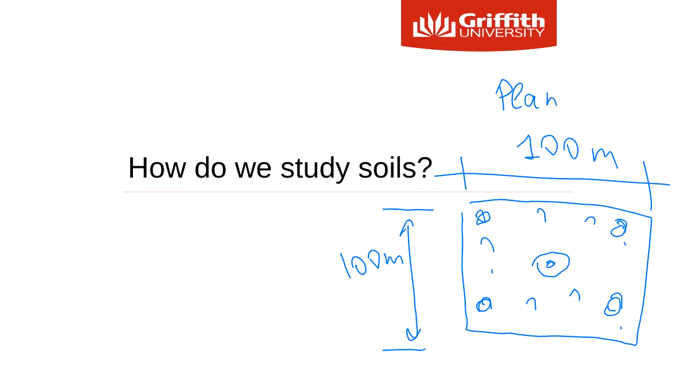And we can just interpolate the results from the middle, and assume maybe something is going to be very similar. So this is how we're going to cover this area.

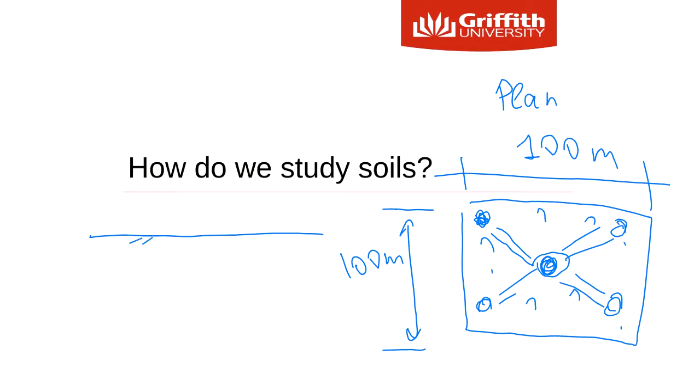So the first thing we would like to do is take samples. So we drill a borehole. If this is the ground, we're going to drill a borehole and collect samples from different depths.

And then we're going to look at the samples and see what kind of soil it is. So if we have more money, we can drill another borehole and also see what is here.

So this is borehole 2, this is borehole 1. Again, we know what is in this area and here, but imagine if this is about 100 meters distance - we still don't know what's in between.

Do you know any other methods, other than boreholes, that we can try to get a little idea what is in between? Because maybe there is the same material in boreholes 1 and 2, but maybe there's something different - what if there's some kind of soft layer of clay? And if we miss this layer of clay, there may be issues when we build a high-rise building.

So any ideas? What else can we do other than boreholes? Boreholes are good, but remember boreholes are probably the most costly type of investigation. So for small houses, you're probably going to have maybe 1 or 2 boreholes drilled for site investigation. But for something bigger, larger, you probably need more boreholes. But there are other methods.

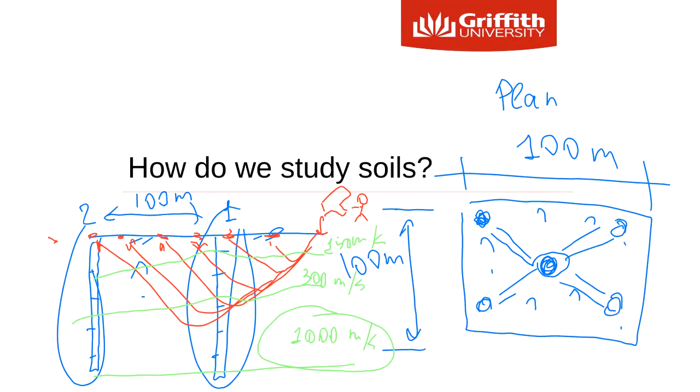So there are a few more methods that we'll talk about today, and I think the best one is for you to know the standard. We just follow the standard when we do site or field site or laboratory investigation, geotechnical investigation. Well, it's mostly site investigation. So it will teach you how many boreholes to drill.

It will teach you how deep the borehole should be, depending on the type of structure you design, what kind of and how many samples you need to take, how to describe the samples based on their properties. So everything is in this standard. This standard is available at any geotechnical company, and they follow this standard. So even if you don't know how to do that, just read the standard. It gives you a good explanation of the work.

Another thing which is important for site investigation, this is actually something that we need to do before any site investigation. We need to find geological maps. In Australia, we can find a geological map for any area, for any territory. They're all covered with a geological map.

So we just need to find what area in particular we're interested in, and I think we can buy a map from, I believe it's called Geoscience Australia or Geological Society of Australia. They sell maps, usually like $25–50 for each area.

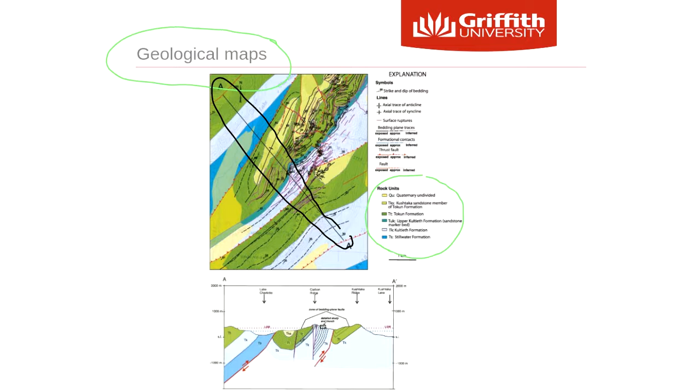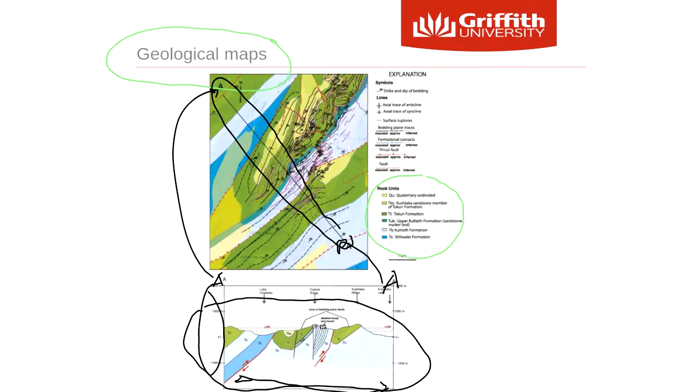And this is something that you will be required to do for your project number 1. So here you have depth, and this is distance. It starts from point A to A dash. Point A is here, A dash is here, and then it shows you what is underneath the surface. This one goes for 1,000 meters, which is very good.

So it gives you some idea about how these rock formations are placed against each other. If you see, this one actually dips at some angles. We wouldn't know that if we just look at the surface, like at the map—we don't know that they dip at different angles. When we see things like that, it's actually not very good, because all these folds and dipping of rock strata or soil formations make the soil or rock weathered and loose. So that's how we know that this area may be a little bit dangerous, and we need to do something about it.

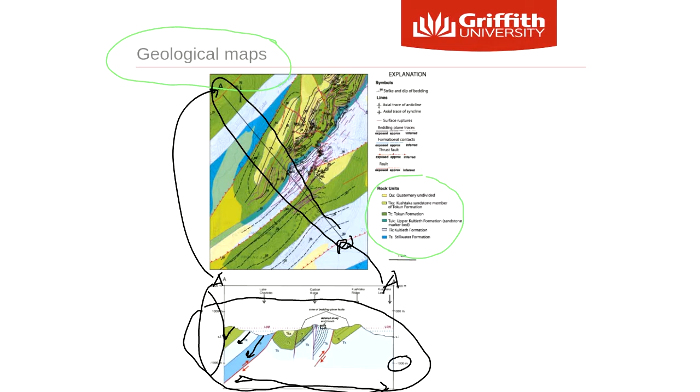Okay, so this is the geological map, and this is boreholes.

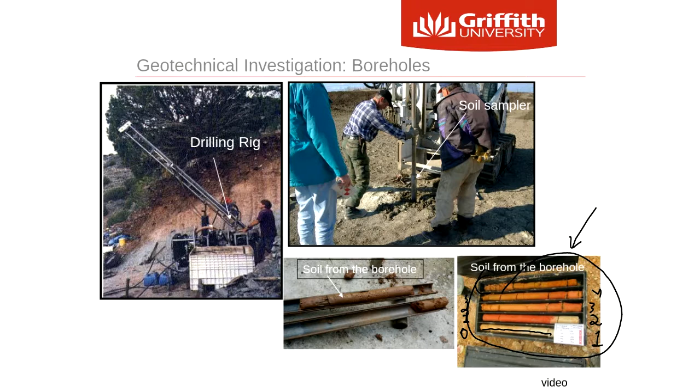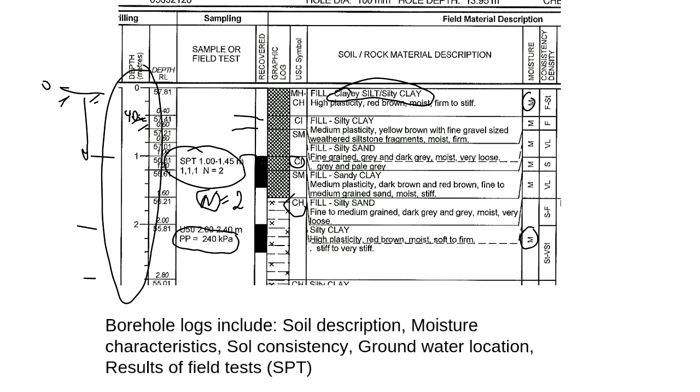Okay, another thing—groundwater. Where is groundwater here? There is no groundwater level here. I will show you in other borehole logs, and in the borehole log you'll be given for project one, there will be another column somewhere that will show you the groundwater level.

It shows where the water is in soil. So you may be aware that there is always water in the soil, and it creates a groundwater level, which means that soil below this groundwater level is saturated. So this is also important information. This is something that we need to know when we calculate stresses in soil, and I will teach you how

to do that later. Okay, so I'm going to my slides for today's... The recovered column represents the sample that was collected. So they collected a sample at this level and collected a sample at this level. So it's a U50. So maybe the way they drill it, they just drill until 1 meter. That's auger drilling, and they didn't collect good quality samples.

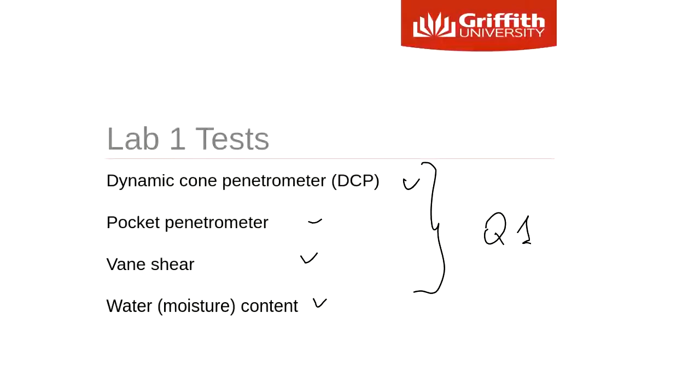Okay, so dynamic cone penetrometer tests. The first one we'll do, and there's a video of the test procedure, then pocket penetrometer, vane shear, and water moisture content. So all this will be in your quiz. Either it's a multiple choice question about test procedure, or for the water content test, I'm going to give you some data and you'll be asked to give me the water content. I will show you how to do it today.

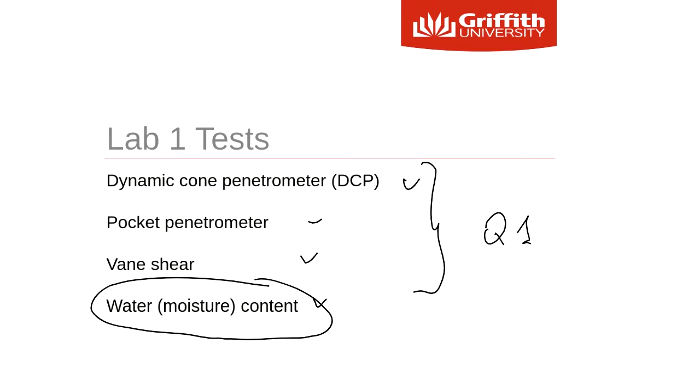Okay, so we'll start with the dynamic cone penetrometer. So this is the device. It has this rod and it's attached to the knocking head. And on top of the knocking head, there is a hammer. We lift the hammer manually and then release it. It falls down, it hits the head, and it will generate some energy force that will drive

the cone down. So in the video, you will see there are marks here, and each mark is 10 centimeters. So 10 centimeters, 20, 30, 40. So what we do, we just count the number of blows of the hammer to drive the cone in the ground by 10 centimeters. So when it goes all the way down until this level, we just need to know the number, let's say 2. So it means that we just need 2 blows of the hammer to drive it in the ground by 10 centimeters.

Then we just start counting again. So we'll see how many blows we need to drive the cone down by another 10 centimeters. And we just continue this test. For soft material, you will see that the test will go very quickly. It will be maybe 1, 2, 3 blows, and it will just go down because it's soft. For denser material, we will need a higher number of blows. And at some point, we're going to hit very hard material or even rock, at which point we cannot really go down anymore.

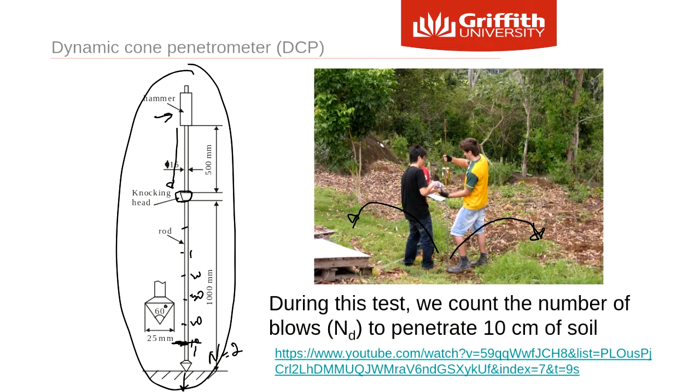So this is the kind of results that we can get from that very expensive test that we conducted. That was almost $1,000 worth. This is the data. So for each 10 centimeters that we penetrate the ground, we count the number of blows, and we plot it against the depth. So actually in that test, we went almost till 5 meters. That was really crazy. So don't do it. Don't make the same mistake as I did.

So the good thing about this test is it can give us some estimates of the soil strength. So if we know that the number of blows is maybe 2 or 3, we already have some correlations, some empirical relationship. If we know the type of soil, for example, clay, we can have some idea about its strength just looking at the number of blows.

Another good thing about this test is that you see how this one goes almost to 3 meters. There is some variation in the number of blows, but it only goes from maybe 2 to 4, right? So it looks like the same material or something very similar. And then at some level from 3 to 4, you will see some changes here. So in this case, you have a different number of blows. I think it's about 10 at this point, right?

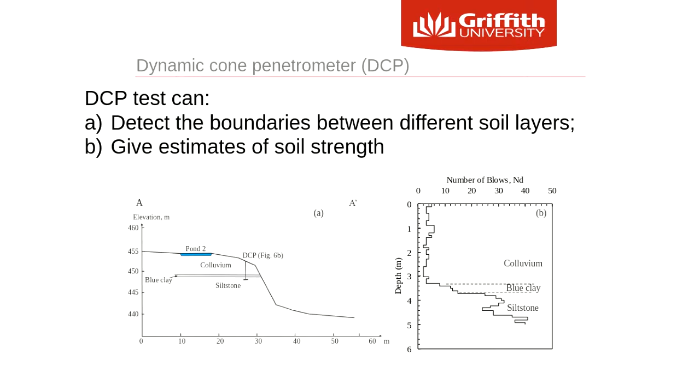So what we did before when we had face-to-face labs, students actually would do this test. We have these pits just in front of our laboratory outside that we built a few years ago, so that students can do this penetration test. I'm just going to show you what kind of data they used to get and how to analyze it, because you'll probably be asked to do it for your first project, project one. And at least there will be a question about the test procedure in the quiz tomorrow.

So let's say that we start from the surface, and the number of blows to drive the cone 10 centimeters down will be 1. Then it's a little bit denser, we need 2. Then for the next 10 centimeters, again, maybe 1. Then 2, then 3, 2, then we have, let's say, 5, 6, 5, 8. Here we have 12, 15, 16, 15. And then we just go down, down, down.

So first we're going to plot the data. The way that we plot data is we put here the number of blows, and here we write depth, which will be in centimeters. So what we can do is just define the scale. We have maybe 10 blows, that will be 10, and here will be 20. And here will be 10 centimeters: 0, 10, 20, 30, 40, 50, and you go down, right?

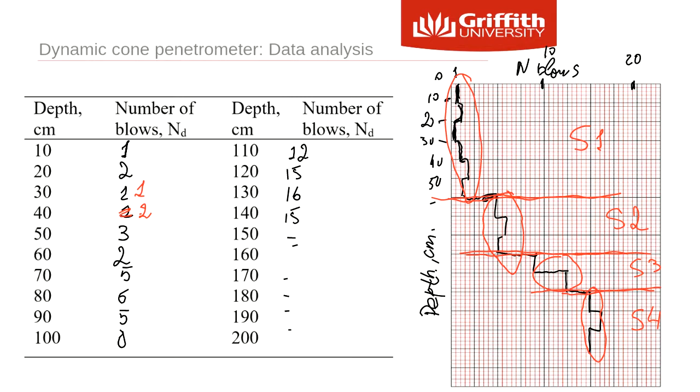Okay, so going to the next slides - pocket penetrometer. Actually, many geotechnical engineers and geological engineers or practitioners like using the pocket penetrometer test. Why? Because it's a very small and portable device - you can put it in your pocket, pocket penetrometer, and then bring it to the site. And it's going to give you again some idea about the strength of soil. So whatever test we're talking about, it's mostly about how to measure the strength of soil.

So in geotechnical engineering, because we deal with nature and soil properties, even within maybe 10, 20 centimeters of soil mass, they will vary. That's not going to be exactly the same as, let's say, for concrete or for steel - we know the properties are the same, but for soil or even rocks, but mostly for soil, you will see the properties change a lot. That's why it's very challenging for geotechnical engineers to do all the design, because imagine you deal with a large area like 100 by 100 meters, and you need to design a structure that will be in that area, and you need to have a reliable geological model of that area.

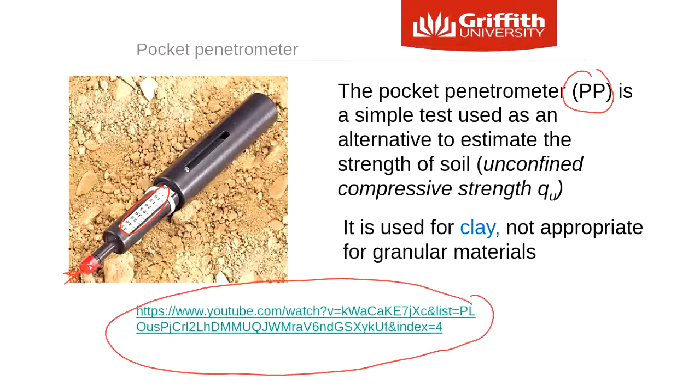So what was I talking about? I just lost my idea. My point is that the more tests you do, the more reliable values you get. For this pocket penetrometer test, it's recommended to do 3 tests on the same soil, in a slightly different location. The good thing about this test is we can correlate these PP values to unconfined compressive strength.

So pocket penetrometer values by themselves will give you some idea about the strength. Let's say this soil has only 10 kPa, the other soil has 200 kPa - there's definitely a big difference. But unconfined compressive strength is more commonly used for design purposes. So if we get some value of pocket penetrometer, we can change it to unconfined compressive strength.

Guys, do you know what we measure with kPa? Anybody knows what kPa we use for? Pressure - well, I don't think so, I think the correct word will be stress. Stress, we use kPa, which is also kilonewtons per square meter. That's correct.

So for soil mechanics, geotechnical engineering, rock mechanics, we need to use the stresses. We use stresses because we need to know the stress that is acting on soil or rock, and that will also give us the idea about the strength of soil and rock. So if it can bear the stress, that's very good. If not, well, it will collapse.

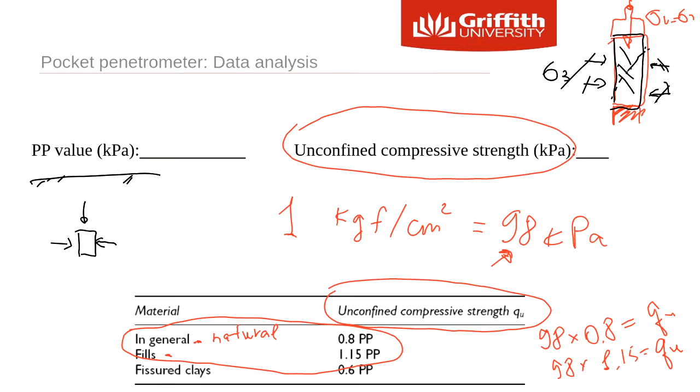Okay, so just remember this table. It may be useful for your quiz tomorrow. Just giving you some tips, guys. Look at this.

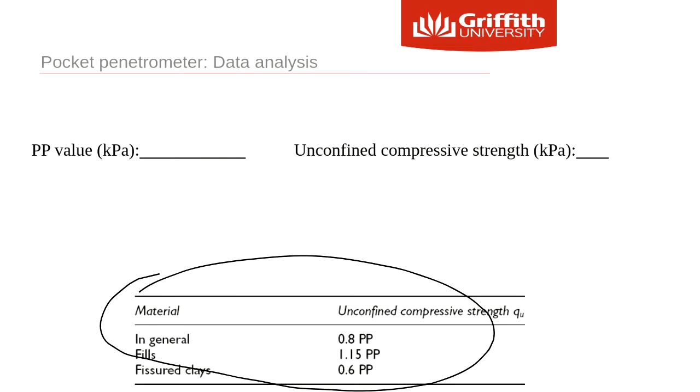vane test. Well, this is actually myself. I'm not sure if you met me in person. Probably no, you haven't yet. That's me. And I'm not going to talk about vane test, there's not really much to discuss. It's kind of a pretty simple test.

I would like you to watch the video. Please watch it because there will be questions in the quiz about the vane test. It's only less than 2 minutes, and there's not really much to talk about. It tests again to give you some idea about the strength of soil, something that we can get with a pocket penetrometer, and we already talked about pocket penetrometer.

So the way we'll do it, we'll just collect the sample and then put it in the oven and dry it up. So before that we need to know the mass of soil, then we put it in the oven. We set temperature to 105 degrees Celsius, and we wait for 24 hours, following the standard.

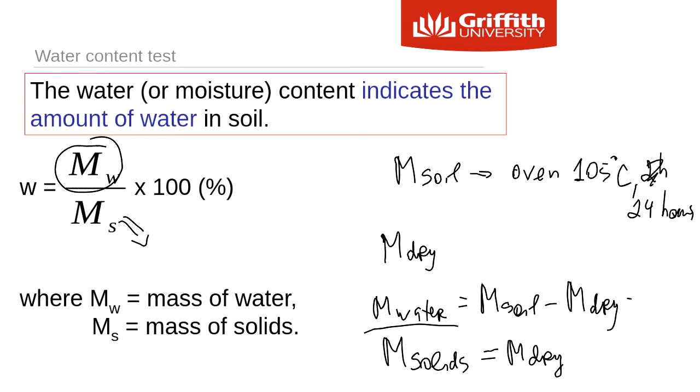So what we do, like face-to-face laboratory, students measure mass of container. So they do 3 tests. Again, you need to do at least 3 tests. 3 tests should be enough. Don't do 1 or 2 because you want to get reliable data, and there is always variation. Or what if you didn't do it correctly? So it's not going to be enough to do only 1 test. So you do at least 3 tests according to the standard. If you do more tests, that's even better, but 3 should be enough. So in this case, we do 3 tests: test 1, test 2, test 3. And then we measured first the mass of empty container.

So for the first test, it's the same soil, but we just do 3 measurements. So we have mass of containers, we have mass of wet soil plus container, and mass of dry soil plus container. So how about I'll give you a minute or 2, and you give me at least 1 value of water content. Can you guys do that? This is something that you'll be asked to do in the quiz as well. So let's practice.

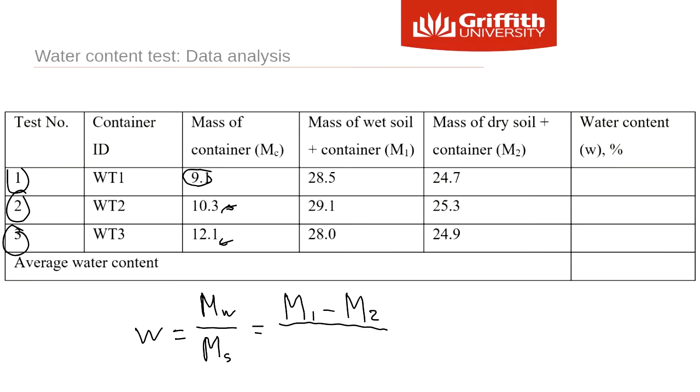Mass of soil? No, because it's just mass of container. We just need mass of container because we put soil in the container. We need to put soil in the oven, so we still need to put it inside the container—how else could we put it in the oven? That's why we first measure the mass of container, because then we just do the calculations. It will be easy if we know the mass of container, because we just deduct it. For mass of water, we don't really need to know the mass of container—we just look at the difference between mass of wet soil and mass of dry soil, because they both have the container. It's the same thing.

And yeah, for dry soil, you need to subtract, deduct. So it's going to be mass of dry soil, and you need to remove mass of container, because this one has dry soil and container. This has container, so we just need to have dry soil.

Yeah, 24.4, that's correct. 25.3. For water content, when you use percentage, just use only one decimal number—that's the standard way to present it. The test isn't that accurate: 24.2. And then we take the average of the three, and the average will be 24.6.

Okay, so guys, I hope you understand how this works, right? So just be careful with the containers. This is a typical procedure. I think when we did some exercises yesterday in the lecture or tutorials, we really didn't talk about mass of container—we just said mass of wet soil, mass of dry soil, but we sort of simplified the whole thing. But the way we do real tests, we put soil in a container, so we need to include it in the calculations as well. And you'll see it for other tests too, for the plasticity test, for the compaction test. It's just because we need to measure, we need to put soil in the oven, and we can't just leave it as it is—we need to keep it in the container.

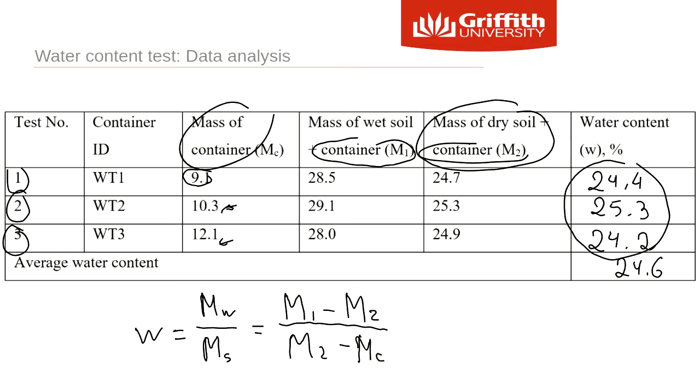Do you have any idea how to draw a cross section? Maybe you've done it for some other courses, like a cross section through some area. No?

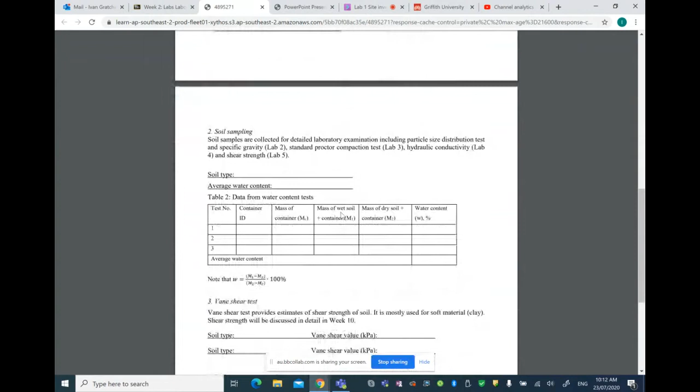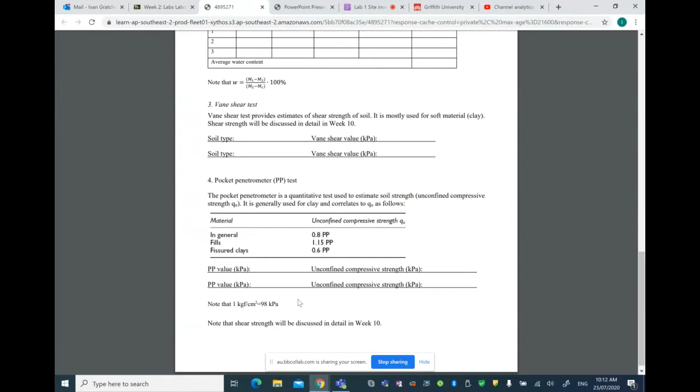This is something that we did with students outside face-to-face, and this is the test they performed. They also performed a water content test, and there is a table here for pocket penetrometer. I put this conversion factor, kilogram force per square centimeter to 98 kPa, just for your reference. You may not really need it, but you never know.

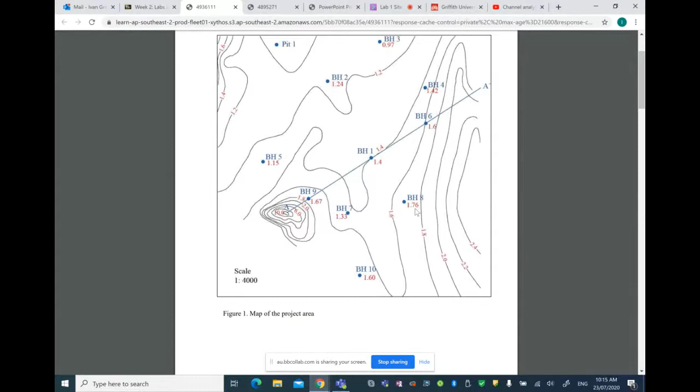So BH1 is located here. You see this BH1 doesn't have any elevation next to it, but for example here BH8, it's not on the elevation line, so it says BH8, where it was drilled, the surface has elevation 1.76 meters. So all boreholes have information about elevation. You see this says borehole BH1, elevation 1.4 meters, so you also need to use this.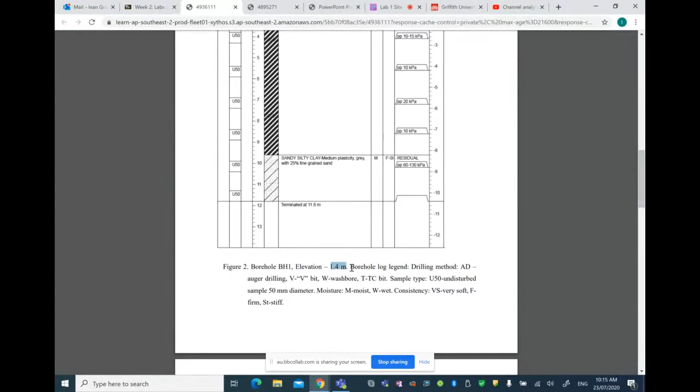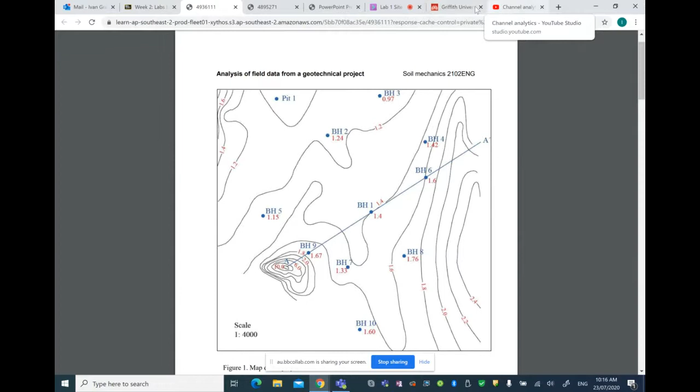Each borehole comes with a legend, because there are some symbols that you may know. All the symbols need to be explained, and I'll explain this for you. You see it has PP here, which means pocket penetrometer values, and you already know what pocket penetrometer means. That's about it, so you are given this information. This is from a real site investigation, well I did modify it a little bit, but this is from one of the areas on Gold Coast. Just to show you, and now I want to go back and share my presentation with you.

So I'm now going to explain how we draw a cross-section. We'll go to next. So what I'm going to do now is I'm just going to use only half of the map. Usually it goes, let me change, should probably go like this. But I'm just going to deal with the left-hand side part. It can also go to here. So I just cut in the center, and we only look at this part. And you do the same thing for the right-hand side.

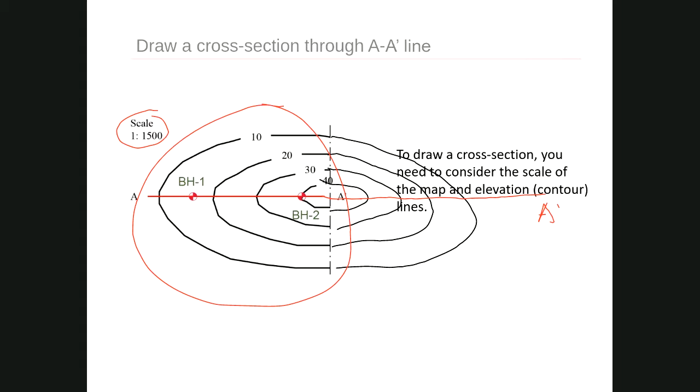So first you look at the scale, and the scale says 1/1500. So the way I read this scale, I remove two zeros from the right, and then it's going to be 1 centimeter equal to 15 meters. So on this map, if we measure 1 centimeter with a ruler, for the cross-section it's going to be 15 meters. So this is what it means.

The scale I showed you from previous years was 1/4000. This means that 1 centimeter is equal to 40 meters. Again, remove zeros. So you need to know the scale when you draw a cross-section.

So the next step, as I said before, you need to see where this cross-section line A and A dash crosses elevations and boreholes. So this is a point, I can call it point 1. Then another one, point 2. Then this one is point 3, point 4, point 5. Then if it goes here, point 6, 7. So you need to pick up those points.

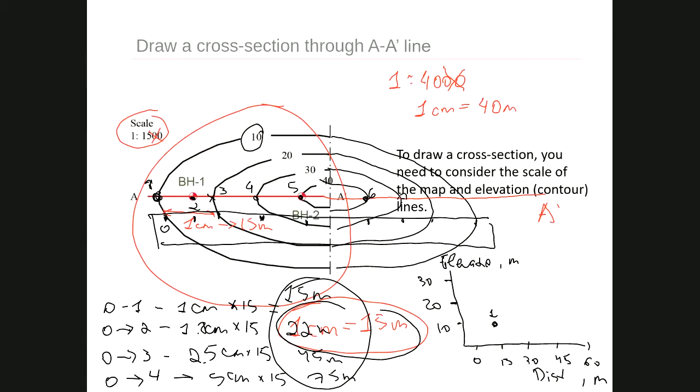So this is going to be point 1. This is going to be point 2. Again, this is just a rough example. Point 4, and you connect. This is just a rough example, guys. I don't do it to scale. I just want to give you some basics on how to draw it.

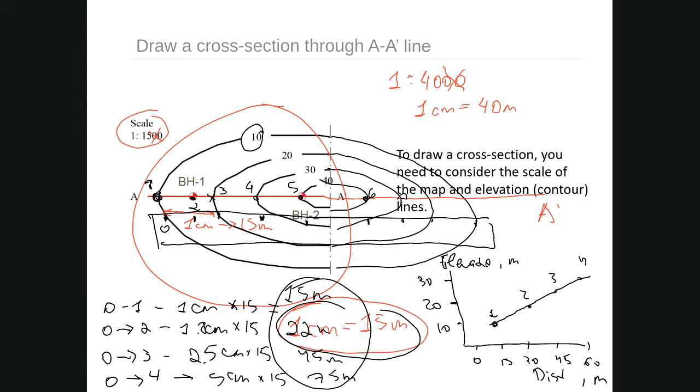So I want to go to the next slide. It explains a little bit more about scale. So if it's 1 over 1,500, 1 centimeter is 15 meters. The elevation lines indicate the topography of the site. So that's what you're going to draw as elevation points, 10, 20. It all means meters, 10 meters, 20 meters, 30 meters, 40 meters. But we don't write meters, we just write the numbers. All the numbers are usually in meters.

And BH-1 indicates the location of borehole 1. Yeah, this is the first borehole, second borehole. So you're also given borehole logs for each of the boreholes.

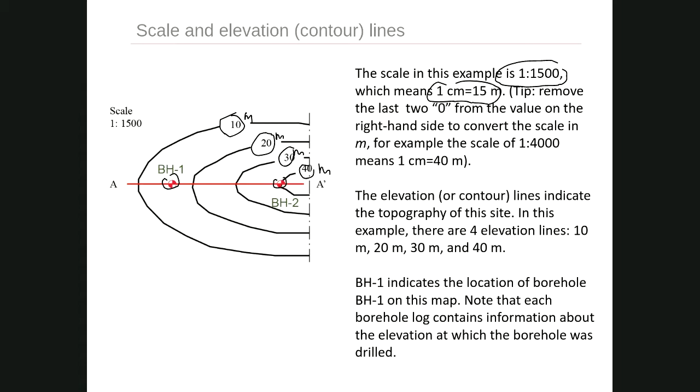And well, the procedure that I just already tried to explain to you guys with my rough sketches. So we start with, let's say, call it 0, and then the first point,

second point, third point. So what I would suggest, if you have a borehole which is not sitting on any of the elevation lines, you're going to look at the borehole log and see what the elevation for that borehole is. There is always information provided at what ground surface level this borehole was drilled from. Let's say it says maybe 1.3 meters. Sorry, not 1.3, it should be maybe 13 meters. So you also include this one for your ground surface measurements and drawing. So you get all this.

Another thing that I would recommend: some students measure from here till here, and this is 1 centimeter. Then they measure from here to here, and this is maybe another 1 centimeter. Then from here to here, maybe 2 centimeters. You can still do that, but it's not a very good way. The best way is you start from 0, and then you just measure from 0 till here, till here. So this is 1 centimeter, this is going to be 2 centimeters, this is going to be maybe 3 centimeters. Don't do it from one point to another, because that's how students make mistakes. I've seen them doing this, and I always tell them to do it in one go.

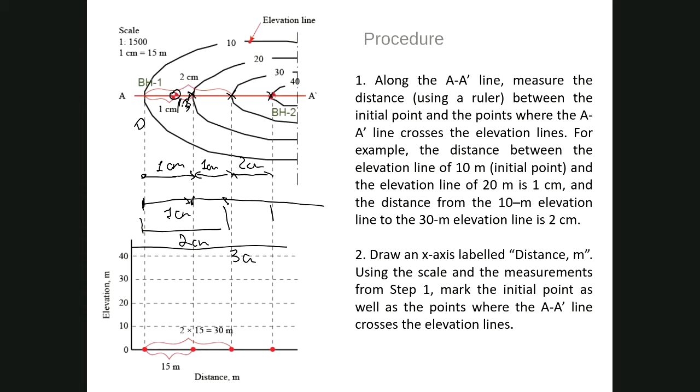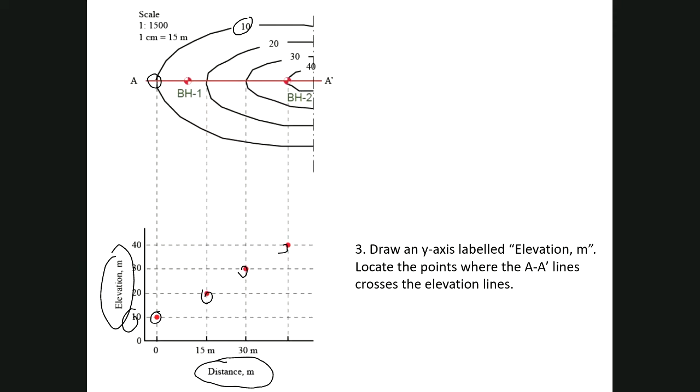Then you use distance. Don't forget to write units, elevation, also units. Many students don't write units, or they don't label their axes, and that's how they lose marks. So this is a mistake. Then this is 10 meters, so this point is going to be 10 meters. Next one is 20 meters, 30, 40. So you draw these points, and you connect them, surface. The next step is, your map always comes with boreholes.

It has borehole 1 and borehole 2. In borehole logs, you know the elevation. In this case, I'm not sure what the elevation was, maybe it was 15. So you're going to find the location of the borehole on this cross section. That's for borehole 1, this is for borehole 2. And this is very important, you're going to use this scale to draw the cross section to scale. As I showed you before, the borehole log has a scale on the left hand side.

It shows you depths, or it even shows the elevation. It depends on the borehole. Sometimes it shows both elevation from the ground surface, or just the depth of soil layers. So you're going to use this scale that comes with the borehole log, and draw this borehole according to the scale on the left hand side. If this borehole is altogether 10 meters, then from here till here it should also be 10 meters according to this scale. Maybe it was 20 meters here, so from here till here it should be 20 meters.

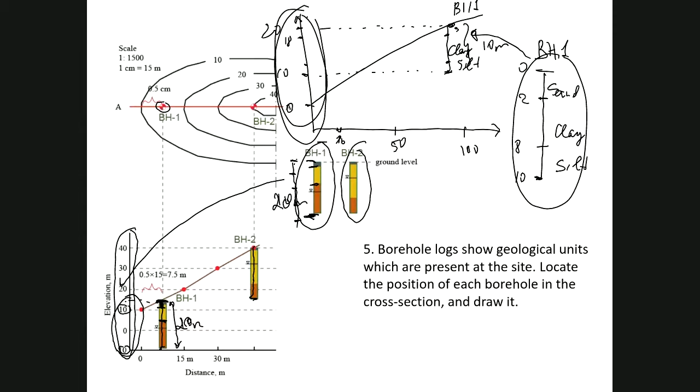Okay, so a few more things that I wanted to mention. There are different ways to draw a cross-section. So the one that's shown here, you see how it has sort of a thick borehole, and it has this kind of rectangular box, and it has different colors here, kind of brownish, then yellow, and something really dark. So this is one way to do that.

Another way to do it, if you have a borehole, instead of color, you can use symbols. For example, we use dots for sand, we use lines for clay, or some other symbols for rock. You can also do that one. You can use the color, or you can use symbols.

But what you need to do if you use this kind of thing, you need to provide a legend. Because if you give this cross-section to somebody with different colors or different symbols in it, they don't know what it means. So that's why it's important to provide a legend. If you don't provide a legend and you have symbols or colors, that is going to be a mistake.

So for example, in this case, when we have different colors, it explains that this dark color means it's silt. I think it's here, silt. Then this yellow color is clay, and this is going to be sand. So that's what we know.

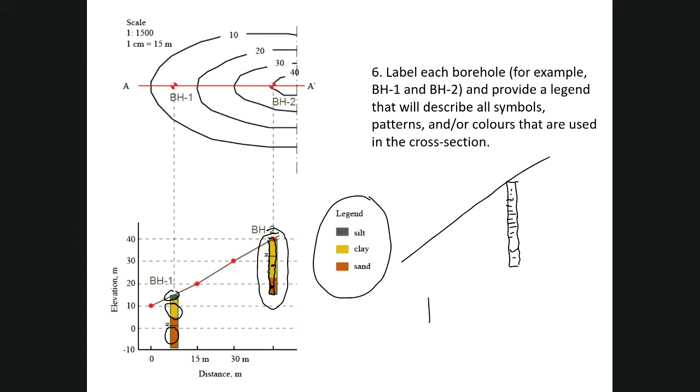If you have symbols, you're going to have a different legend. You're going to draw a box, put dots, and write sand. Another box, draw lines, and call it clay. Another one, I use this kind of symbol, let's call it silt. So this is going to be the legend for this particular borehole log. So it's up to you how to do that.

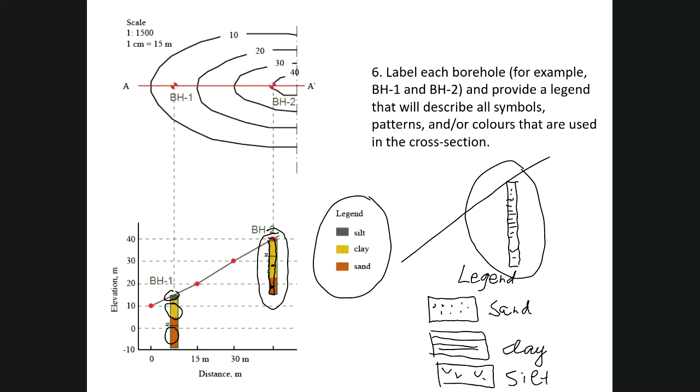So another way that students can do it, either way is fine. Just if you use symbols, you need to provide a legend. Another way to do it, you can just draw a simple line for your borehole, and then you just mark each layer, and then you just write here silt. Here you write clay, and here you write sand.

Here you write silt, clay, and sand. Of course, you need to write this is BH1 and this is BH2. So you can also do it this way. It's kind of simple, but it's still correct. You can choose what you really want to do.

Maybe it's not very visually appealing, and there's another issue with this style. If your boreholes are far apart, that's okay. But if you have many boreholes close together, and you put one in the middle, you'll end up putting lots of text on the cross section, like silt, clay, clay repeated. That's maybe not a good way to present it, but it's up to you. If you have three boreholes far apart from each other, you can do it that way.

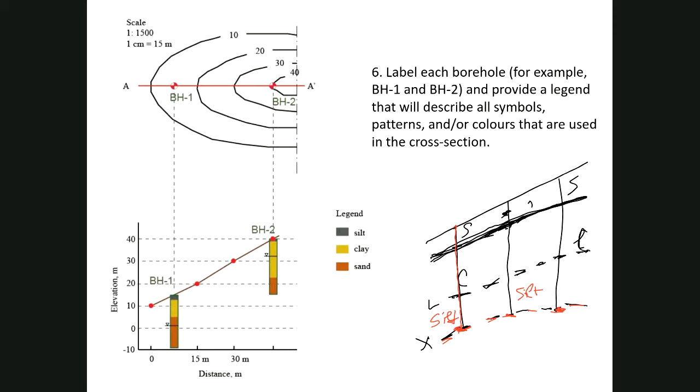We only know that we stopped the borehole at this level. We drilled ten meters and decided that's enough, or maybe we ran out of money. Usually you drill a borehole to a certain length and then stop. At the end, let's say it was silt here, and silt there too, but this is just the end of the borehole, it doesn't mean it's the end of the silt layer. If we drilled a bit deeper, maybe to this level, it would still be silt, and below that would be bedrock.

So the boundary is actually here, what we have at the borehole is just the end of drilling. When you connect the ends of boreholes, you're making a statement that you think the end of the silt layer is here, but that's incorrect, we simply don't have enough information. So never connect the ends of boreholes, that's why.

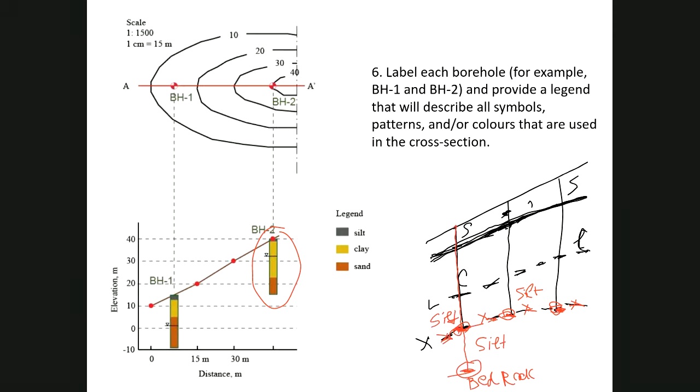On computer, instead of printing out the map, can I use pen and paper? Yes, if you want to draw on a computer, it's up to you. I think drawing on paper will be a little easier, but if you have good software and you're good at it, that's fine. Just make sure you don't connect layers with a solid line, because I've seen many students using computer software draw a straight line, put all the symbols there, and it's just not correct. As long as it's correct, it doesn't matter if it's by hand or by computer. I kind of like it when students draw it by hand - they always make very nice, colorful drawings. But yeah, it's fine to do it by computer.